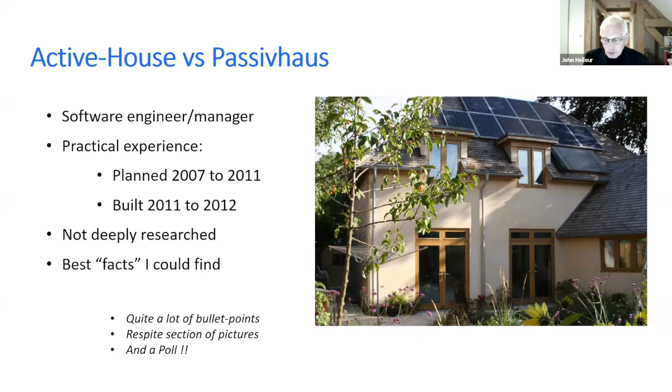There's going to be quite a lot of bullet points initially, but there'll be a respite in the middle with some pictures of the build, which I thought you might be interested in. And we'll have an exciting bit of poll in the middle as well. I offered to do this talk when, about a year ago, we had a talk about passive house in Ipswich, and I thought it would be interesting to do the comparison between my case study new build and this passive house.

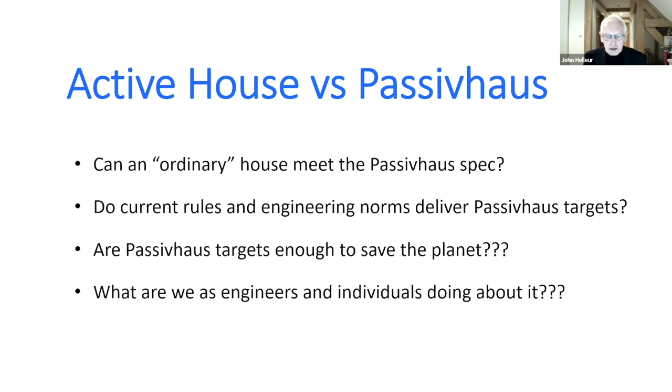And I want to cover 4 questions, really. So can a fairly ordinary looking house meet the passive house spec? Do the current rules and engineering norms deliver passive house targets generally? Are these targets enough to save the planet? And what are we doing as engineers and individuals about that ourselves? So I'm going to cover those 4 areas.

First off, the passive house. So what did we learn a year ago? We learned that primarily it was about the space heating demand. And we were told very clearly that the passive house target was 15 kilowatt hours per square meter per year. And we were looking at walls with a thermal transmission coefficient, so the amount of heat that leaks through them, of 0.15 for walls and roof and 0.8 for windows.

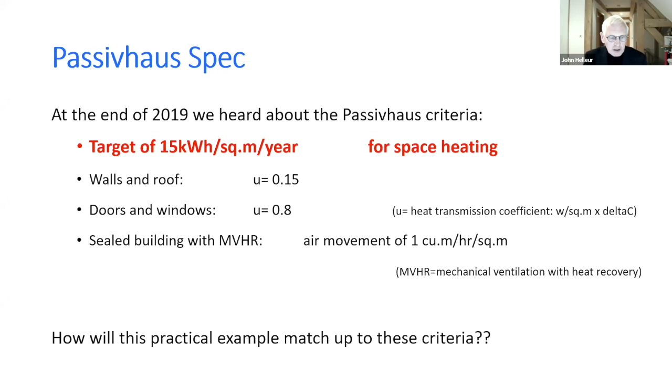And it also is based on a sealed building, so it requires mechanical ventilation with heat recovery. And the air movement has to be really well controlled, with something like 1 cubic meter per hour per square meter of floor space. That's the basis. How does my practical example match up to that?

So just an outline of the case study. So this is a build in central Ipswich. It was a constrained site with mature trees. It was deliberately designed primarily to cope with 2 people getting elderly gradually. So although it's got 3 bedrooms, the main bedroom is on the ground floor, and it was intended to be eco-friendly in both build and operation.

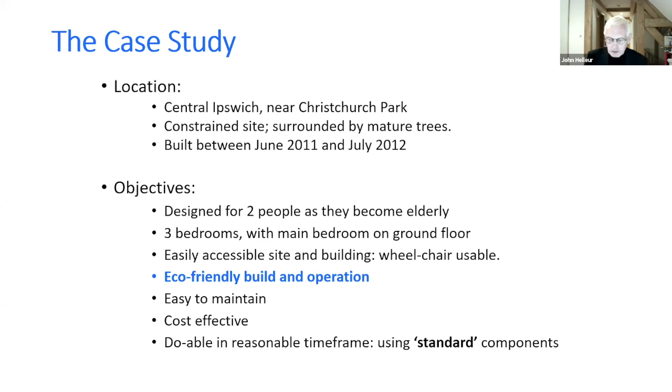And because I wanted to do the build fairly quickly, it was based on fairly standard size components. So can that match passive house? So here's a picture of the front and the back of the house. It's about 168 square meters.

We purchase every year about 3.65 megawatt hours of energy from any source. And that's about 21.7 kilowatt hours per square meter. And the mechanism that we use for walls and roof had this thermal factor of 0.17. The triple glazed doors and windows had a thermal factor of 0.93. And we sealed every joint that we could possibly find in the house and ended up with an air leakage figure of 2.84 cubic meters per hour per square meter.

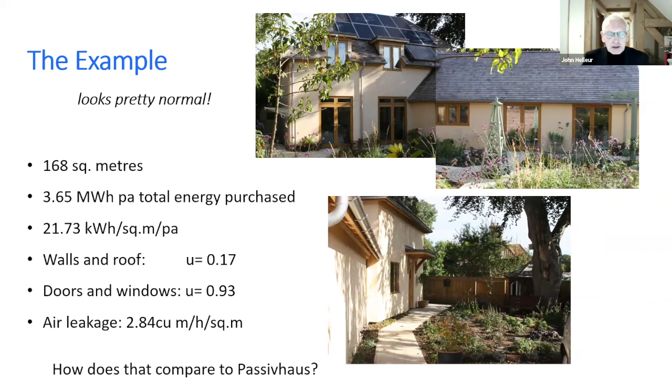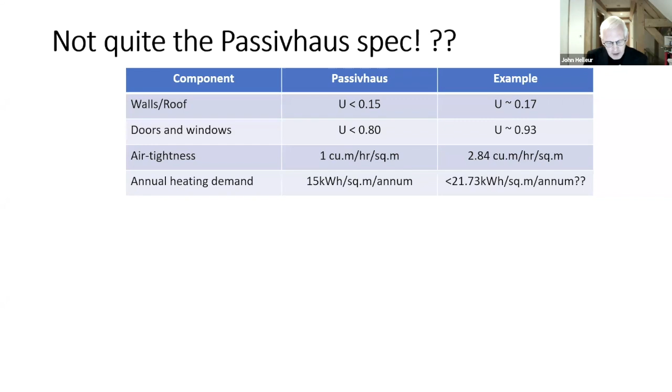So lots of figures there. How does that actually compare with the passive house spec? So the components of walls and roof and the windows fairly close, but not quite close enough. Air tightness, definitely not. So although we tried very hard, the house is more leaky than one would hope to get with a passive house. And at face value, the annual heating demand looks as though it's not there, but we just need to go back and check, don't we? Because that passive house spec was about space heating only.

And I've quoted so far the total, which includes lighting and cooking, washing machines and fridge, freezers and so on, and also the mechanical ventilation. So based on usage through the summer, so when there's no heating at all, the energy demand per day from the house is about 3 to 5 kilowatt hours a day. So multiplying that up crudely, we would get about 1.46 megawatt hours per annum.

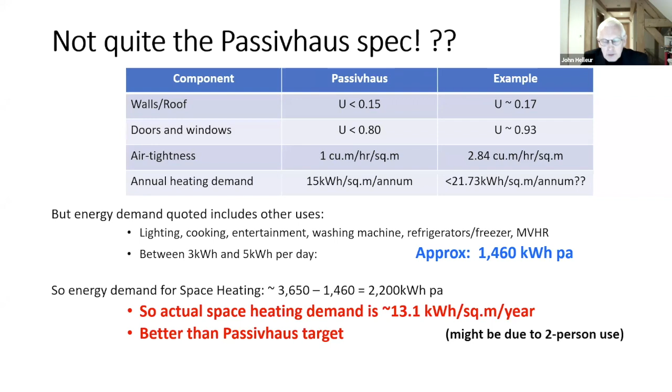So if we now apply that again to our square meterage, we would end up with a total demand just for the space heating of about 2.2 megawatt hours per annum and an overall space heating per square meter of 13.1. So maybe we've got there. I just wave a small flag that this is based on 2 people using the house, so that might not be quite a fair comparison, but let's just say we're pretty close.

Just wanted to mention one other thing here, that the internet tells me that the average house nowadays in the UK has a floor space of between 70 and 80 square meters. So it's about half the size of this case study house at 168. And the average house uses 12 megawatt hours of gas and about 3.7 megawatt hours of electricity. So a total of about 15.7 compared to what we're talking about here, which is 3.6. So we're looking at something with twice the floor space and something like a quarter of the energy demand.

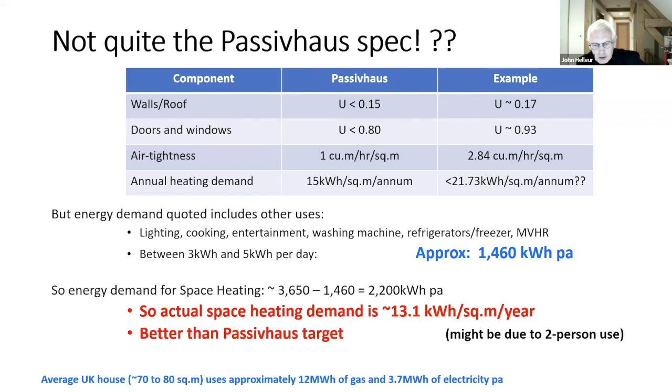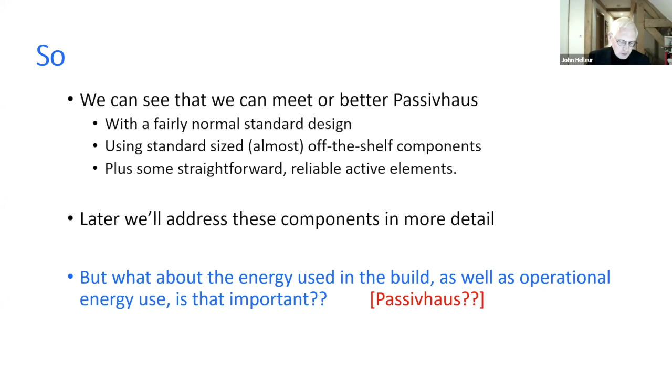So not too bad. So for the first question, it looks as though we could put this together and match Passivhaus, but it looks as though we need active elements involved, not just passive elements. But I want to just raise one thing. So we're talking about operational energy, as I would call it. We're not talking about the energy required to do the build of the house. And I think we should look at that too. I don't know whether that's normally involved in the Passivhaus spec, but I think we should address it.

So it's called embodied energy or embodied carbon. And it's about the energy required to extract, refine, process, transport, and fabricate the materials of the house. The internet tells me it's typically 20 to 50% of the whole life energy of the building. So it's non-trivial, but often it's forgotten. So what should we be building with?

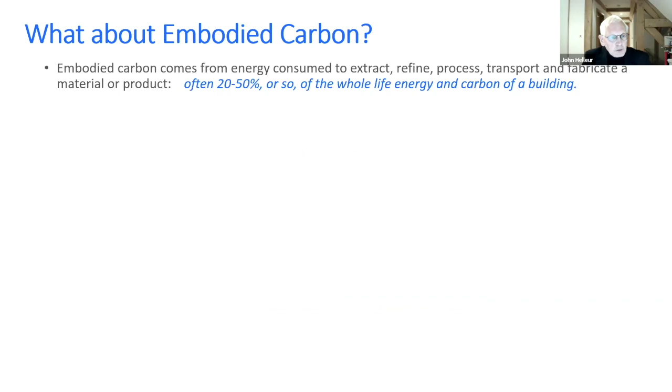But I would just warn that you need to think about the weight of the materials going into a house. So if you take the top line of kiln dried sawn softwood and compare it to clay bricks, for instance, it looks as though the clay bricks might be a better bet. But if you actually apply the weight difference, then the kiln dried sawn wood is 80% less in terms of embodied energy than brick.

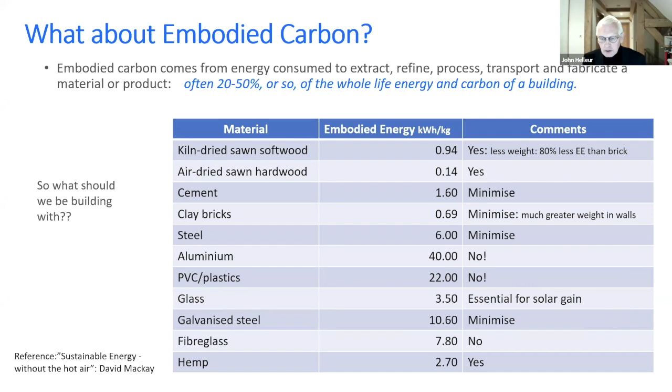You can also see that if you look at things like the insulation at the bottom, comparing the fiberglass with hemp, there's quite a substantial difference.

So embodied energy, let's look at what we actually used in our build based on those figures. The main structure, insulation, walls and roof, used panels made of softwood with hemp insulation, about 370 millimeters width, which is what's recommended these days. The main construction was wood. It happened to be oak frame because we liked the idea of that, but you could use cheaper wood to do the framing. We used softwood and fiberboard panels for the walls and roof, and you could basically make the whole build out of those panels by just screwing them together.

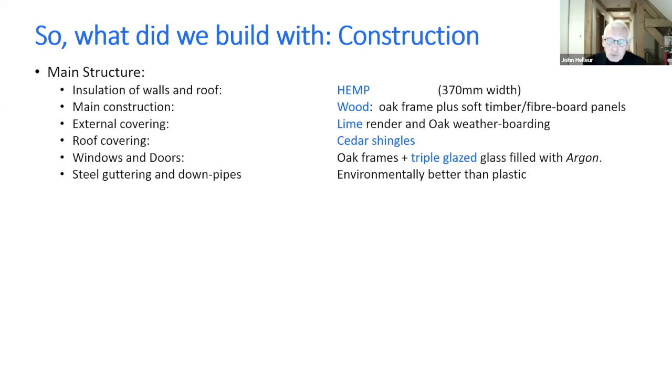The alternative for the oak frame would be glue laminated wood. We put lime render on the outside, which is more eco-friendly than any other type of render, and we also used oak weatherboarding. For the roof, we decided to use wooden shingles, cedar shingles, instead of normal clay tiles. They probably haven't got quite the same lifespan, but they'll last at least 60 years or so. All the windows and doors are oak framed with triple glazing, filled with argon. We used steel guttering and downpipes because that's more environmentally friendly than plastic kit. So that was the main construction.

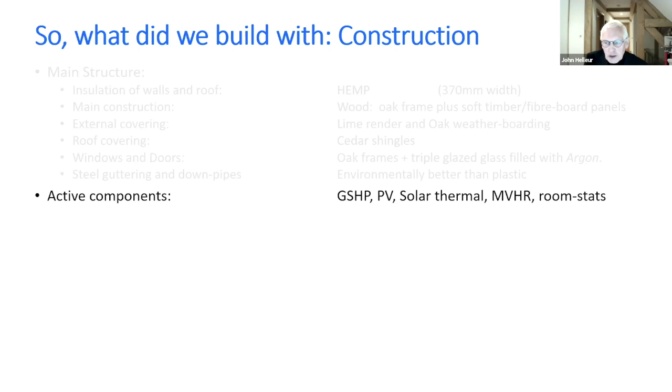We then added active components: ground source heat pump, photovoltaic panels, solar thermal, the mechanically ventilated heat recovery system, and each room has got separate room stats to control timing and temperature. Then there was a bunch of other stuff where we used all LED lighting, 60 LED lights. We've got a 3,000 litre underground rainwater store, which feeds 2 toilets and the garden tap. I'll mention it again later, but that with modern taps and so on has allowed us to save 50% of the water we used to use in our old Victorian house. We designed to have south-facing windows where possible into the main living rooms to get solar gain.

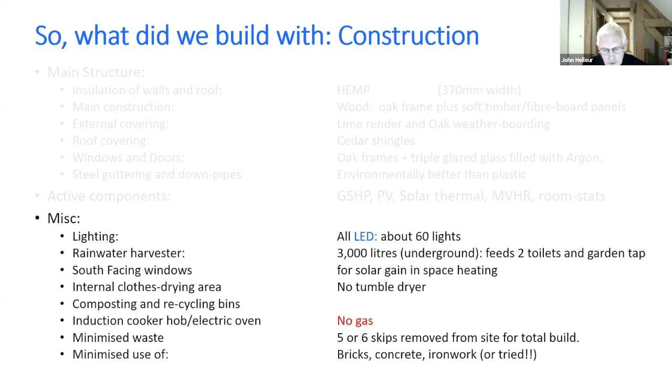We don't have things like a tumble dryer because that uses too much energy. We don't have any gas, so we deliberately didn't connect any gas to the property, and we use a cooker with an induction hob, which seems to me to be extremely efficient. We also minimized waste, so we only used as much materials as we needed to. I was really careful about trying to estimate everything, and I tried really hard to minimize the bricks, the concrete, and the ironwork, although I don't think I succeeded as much as I would have liked.

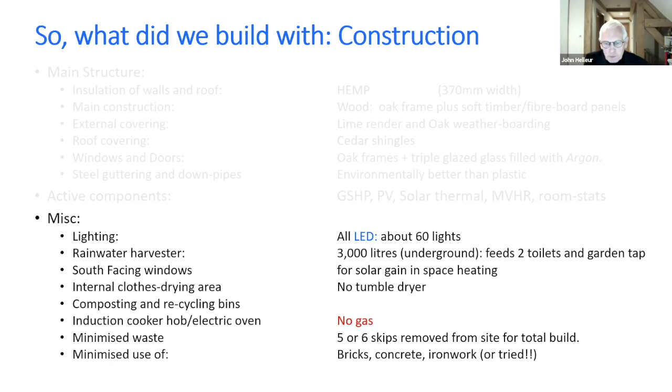So how does that fit together now in terms of the overall embodied energy if we put those components into the build? This is a pretty crude comparison, so don't get too excited about the accuracy of the numbers. I used the MacKay source again to give me the basic information, so that's where the standard house information came from. It's based on a standard house of 100 square meters floor space, and it's based on the usual brick and concrete tile construction.

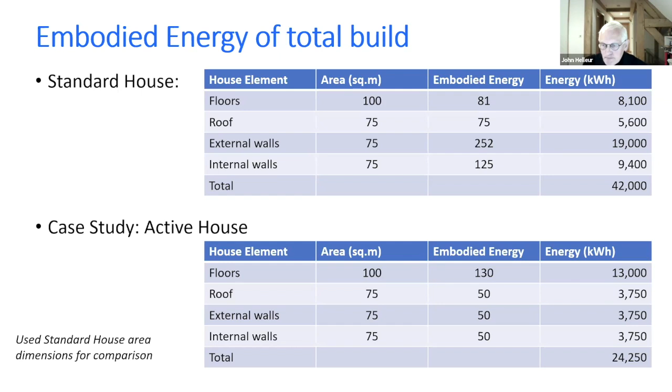So the standard house in this example with 100 square meters of floor space comes out with an overall embodied energy of 42,000 kilowatt hours. I've then approximated putting the materials I used into that same calculation, and it comes out at approximately 24 megawatt hours. That's close-ish to half. To be a little more accurate, it's 58% of the standard British house. If you multiply that up from 100 square meters to 168 square meters, the reality, then the embodied energy of my house is somewhere in the region of 41 megawatt hours.

So you can then compare that embodied energy, the cost of the building in energy terms, with the operational costs. In terms of the numbers I've given you, it's about 11 years worth for the build. If we built with standard components, it would have been something more like 19 years worth of operation in order to save that. So embodied energy, not to be forgotten, but often underestimated.

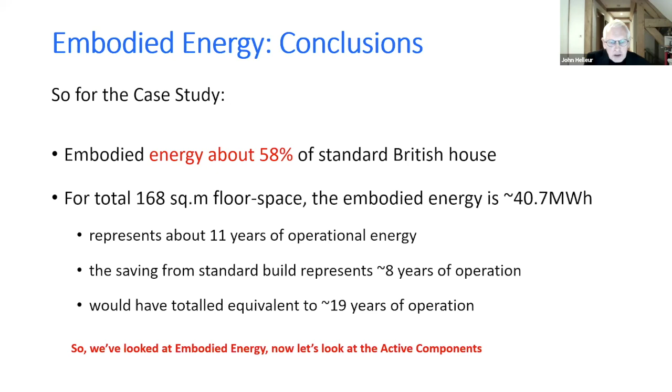So let's look at the active components, shall we? They might be the most fun stuff. PV panels, the obvious thing to stick on the roof. We put 10 panels in. In those days, they were 250 watt peak panels. They're still performing pretty well after 8.5 years or so, probably running at about 95% of spec, and they generate 2.1 megawatt hours per annum.

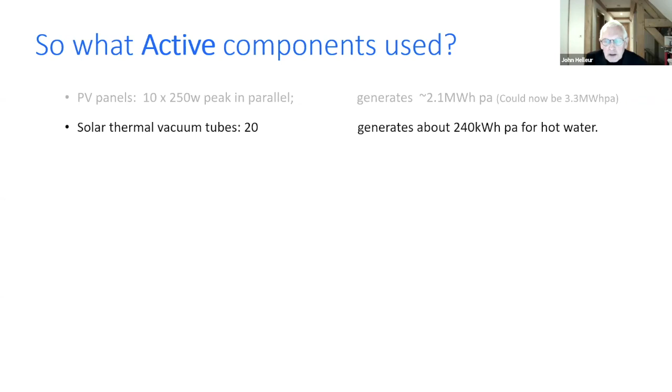I noticed, and I'll talk about it again later, that the latest panels are coming out at about 370 or maybe 400 watts a panel, which would allow me to get 3.3 megawatt hours out of the same roof space. The solar thermal, 20 vacuum tubes, is worth about 240 kilowatt hours per annum to me. I might well have been better off putting 1 or 2 additional PV panels in there instead.

The ground source heat pump is a 6 kilowatt Kensa, manufactured in Cornwall. Nominally it has about a 4-to-1 gain, so for every kilowatt hour of electricity you put in, it generates 3 or 4 kilowatt hours of heat. It's extremely efficient. I think they cost about £5,000 to buy the box these days, and then there's another amount, which I'm guessing is in the £4,000 to £5,000 mark, possibly more, to put a collector in the ground.

That can either be a slinky that goes into a trench about 5 or 6 feet deep, or vertically drilled bores in the ground. In my case, we've got 120 meters of collector in 4 vertical 30-meter bores, because there wasn't enough room for the slinky. I should say the heat pump is extremely low maintenance, so there's hardly any maintenance needed.

That drives an underfloor heating system with water circulating, with 1 or more loops in each room. I'm then able to control each loop independently with a timer and thermostat, so we run each room at a different temperature, potentially in a range of about 18 to 22 degrees or so, so we can be very efficient with using the heat.

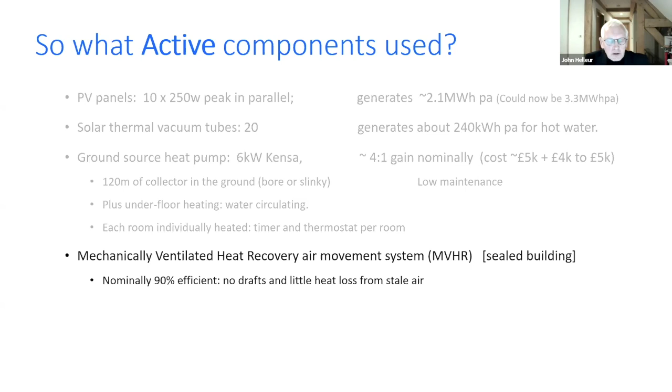LED lighting - we've had experience of a massive amount of these, 27 downlighters. I chose to use GU10 spot bulbs in GU10 holders, which I could adjust because I wasn't sure how to do the lighting design, and that seems to have turned out pretty well. I think we've had about 2 or 3 failures of those in 8.5 years. They've been pretty reliable, not necessarily up to their spec of reliability, but pretty darn good.

So overall there's nothing very clever there when you boil it down - it's mostly pumps and fans. So what's supposedly futuristic is pretty basic, actually, in plumbing terms or whatever. I should say there's obviously embedded energy in those active components, which I haven't calculated, so there's actually more energy cost with them.

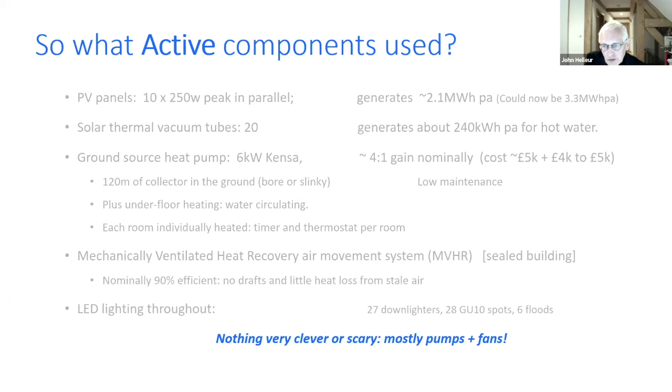I thought you might like to see something about the money. So this is from my personal experience, so it might not be in any way typical.

The operational savings - we were in a Victorian house with similar floor space in the end, but it leaked like a sieve in terms of drafts etc. We made quite a lot of savings on water because we were only using half the water now, which is quite valuable really, plus no boiler maintenance basically. So operational savings over the 8 years or so has been nearly 8,000.

Then there are incentive payments for the various active components - the renewable heat incentive for the ground source heat pump and the solar thermal, and the feed-in tariff for the photovoltaic. I put those in and got those incentives when they were at their best. I think you can still get the ground source heat pump RHI, so that one would still be valid. Overall, the efficiency gains have paid me back quite a lot in the 8.5 years. I looked on the internet to get the current state of play in terms of return on investment and payback period, which I put at the bottom here.

So the internet tells me, and again be skeptical about these numbers, they might not be right, but I suspect they're in the right sort of order. Ground source heat pump with a payback period of 11 to 12 years, and photovoltaics with a payback of about 16 years. The payback for me with the incentives I got was more like 10 years, I think. So anybody with money sitting in the bank at zero interest should be thinking about investing in active renewable components, because you'll get a better return on that money.

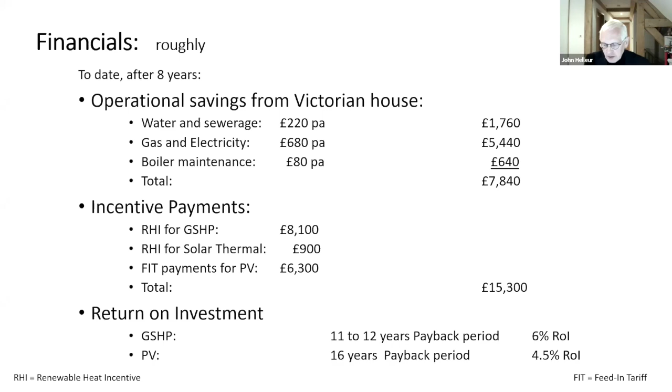So I thought you'd like a rest from the bullet points at this stage. I thought I'd show you some pictures of the actual build, since you're all engineers out there.

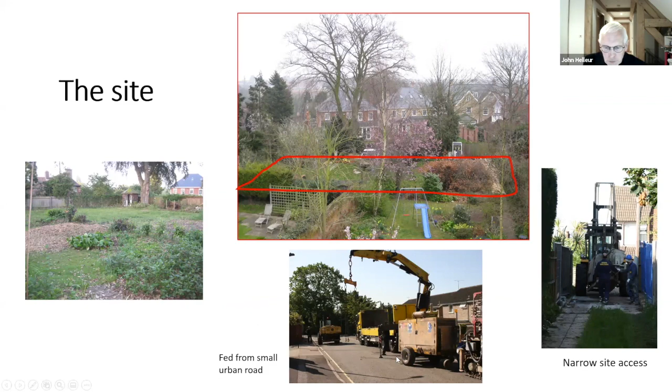Quite fun in that we had to access the site - if you look at the right-hand picture - through a very narrow driveway with about 2 or 3 inches on either side for the major tractors and things coming up and down. And we had to feed the site from a pretty small urban road, really. So it was an interesting exercise.

So the good old tree imposed lots of challenges on the foundations. The root protection zone for this tree covered about a third of the site, and it was that third where it made most sense to put the house. So we ended up needing to put the house on piles rather than strip foundations. Engineering told me it was 24 piles, which had to be 6 meters deep, 300 millimeters in diameter, reinforced.

If you look at the left-hand side, some poor devil had to use an air lance to blow the earth out from the top of each pile hole to check there were no major roots in there that would be damaged by piling. A young worker had to do that for 24 piles, poor chap. I gave him lots of moral support.

This is the picture of the guys drilling. On the top right-hand side you can see piles exposed by the digging out of a cellar, which is basically the basis for an equipment room. Below that, on the bottom right-hand side, you can see it massively reinforced to make sure it doesn't go anywhere, I suppose. The engineers amongst you will enjoy the fact that we planned plenty of ducting for all the services leading into the equipment room.

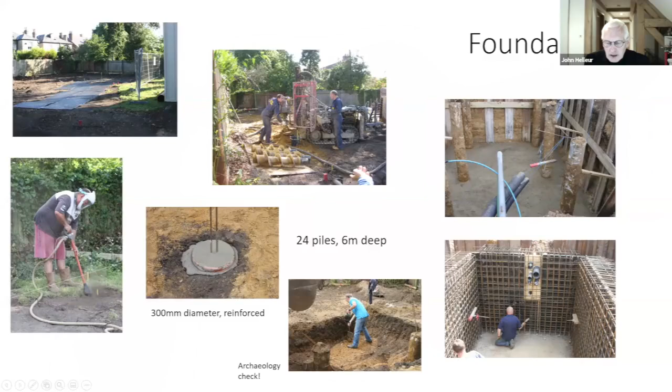And I thought you might like to notice, bottom middle, we had to get an archaeologist in to check we weren't putting the cellar in the middle of any sort of Saxon site. Foundations, lots of concrete and rebar going in. You can see the cellar has appeared as a nice brick bunker, concrete bunker now, which is 3 meters by 4 meters by 2.4 meters high. And here's a lovely clean base - a fairly massive concrete reinforced base sitting on 24 6-meter piles. I think that's probably enough for about a 4-story office block or something.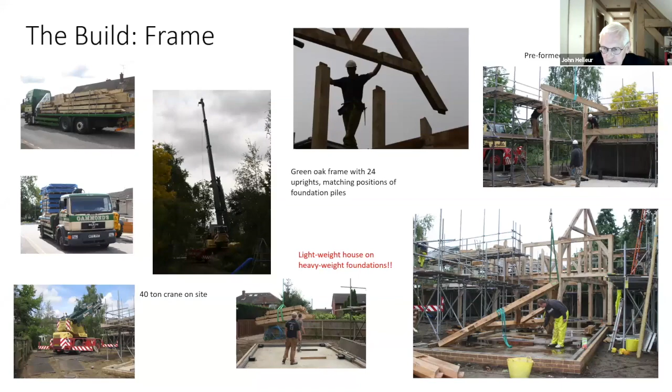It forms its own frame if required, so you just need sort of foot-long screws to go in.

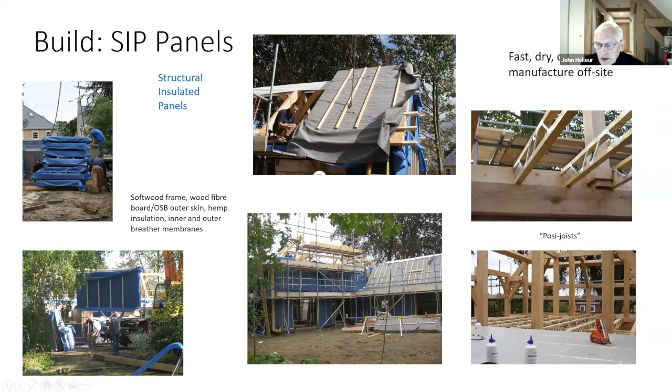You might be interested in the fact that we were using these lightweight posi joists up on the right-hand side, which are really good for running services down the middle of the ceiling void. The last one is for all the plumbers amongst you.

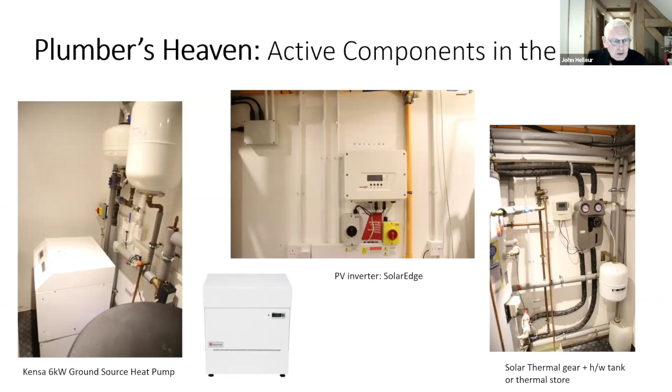So I'm afraid that's all the pictures I've got time for at the moment. So I want to now raise the engineering issues I came up against during this build.

What's happening is the building industry seemed, certainly at that time, and I suspect it still is when I look at building sites, still clinging on to old methods and components. It's still not worrying about the embodied energy of what it's using to make the builds.

And there seems to be little understanding at any level, from architects onwards, it seemed to me, certainly with my experience anyway, of what's needed with a green approach.

So I certainly ended up fighting at every level to make sure that green solutions and new techniques were put in. I should stress that the approach of SIP panels and so on, I think will work extremely well and is very amenable to factory production.

So it's much more rapid on site. You don't get loads of problems with water, etc. It's a quicker and drier solution. I'm sure in Germany and places they actually have services already installed in those SIP panels, so you can just plug wiring, etc. together.

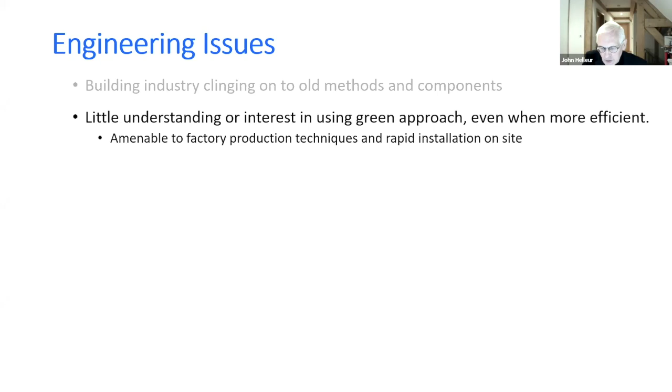I was told by my contractors that there's massive amounts of waste on sites generally, all of which is costing energy. I came across several examples of overestimation.

Had a substantial problem with the heating design where they were trying to get me to buy a ground source heat pump which was twice the size as it needed. I ended up having to do my own spreadsheet and worked out that in worst case I needed about 2 kilowatt hours per hour.

to heat the whole house under really cold conditions. So the 6 kilowatt ground source heat pump is actually overkill, really.

And I still think maybe those foundations were a bit over engineered. I'm sure the engineering company I used did all the right things, did the right algorithm and so on, but I would question whether that's appropriate with a lightweight house.

So it was a lightweight wooden house sitting on 24 pillars. You would think that that wouldn't require a massive base, but there you go.

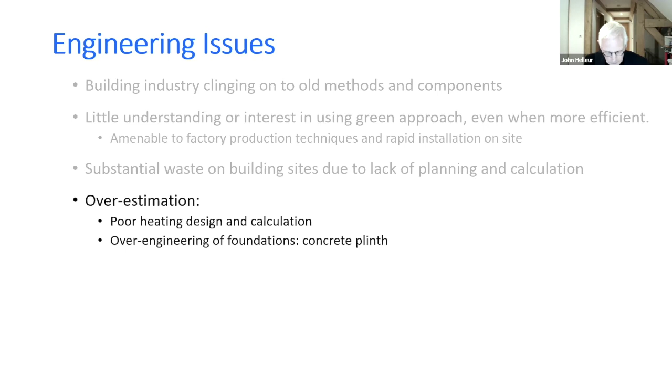I think the bit that got to me most was the fact that to get planning permission, at the time I had to fill in a code for sustainable homes, which was a point system to encourage sustainable buildings, apparently.

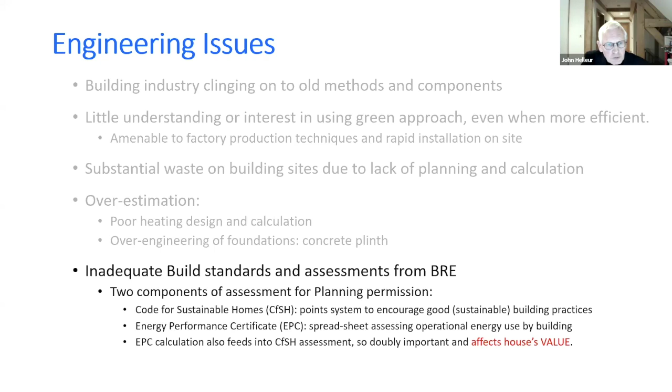I had to get an energy performance certificate done, which was a spreadsheet assessing the operational energy of the building. So it was interesting because I wonder what you think the answers would come out for with this house.

So we've just seen that it's very close to passive house, maybe slightly better even, so that's the operational energy bit is good. You saw that the embodied energy bit was pretty good, and you can take it from me that I was very careful with the build.

Where did we come out in terms of the code for sustainable homes, which is a range, it goes up to 100, and the pass mark for planners is 60. So here's what we got. So we just passed.

We didn't get highly efficient on the energy performance certificate either, which I was fairly incandescent about when that happened. I decided I'd look into it, so I went through very carefully the code for sustainable homes. This was in 2012 now.

What I found was it was very biased towards site management points and biased away from embodied energy and operational energy points, which seemed to me to be the opposite of achieving a sustainable home. It was also radically biased against self-builders. You couldn't sign up to their considerate constructors scheme, lifetime home schemes, or waste management scheme.

Even though you followed all the principles, you couldn't get any points for that as a self-builder. For the spreadsheet bit, I eventually unpicked it step by step and discovered it was biased against new technologies—it totally omitted LED lighting. The one I liked most was that you got more points for an efficient gas boiler at 90% than you did for a ground source heat pump at 400% efficient. I found that slightly confusing. Overall, I discovered an error level of about 30% in the spreadsheet.

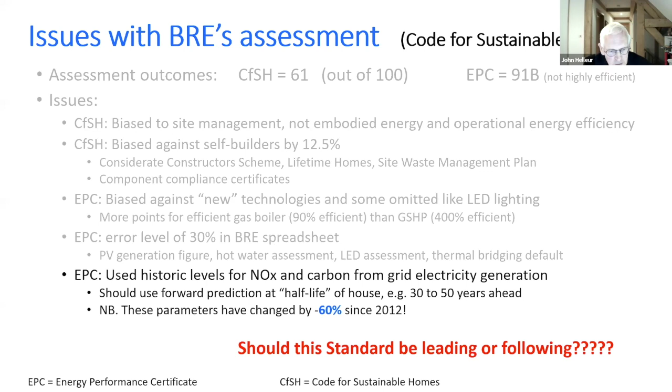The bit that irritated me most was that they calculated the NOx and carbon levels for grid electricity generation from figures that were from, I think, 2008, maybe 2010, not 2012 when I built the house. My point would be, why isn't it a half-life of the house? So if you expect the house to last 60 years, surely you should take the predicted electricity generation figures for carbon and NOx at 30 years hence.

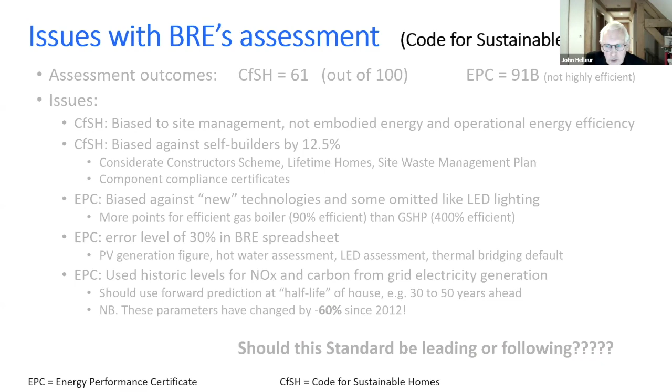I also sent them a report with several recommendations. I don't know what happened to that, but I think the Code for Sustainable Homes has been stopped, and I don't know what's replaced it. I also know the EPC is still spreadsheet based, and I don't know what's in that anymore. So if you're interested, you may have to just unpick those yourselves.

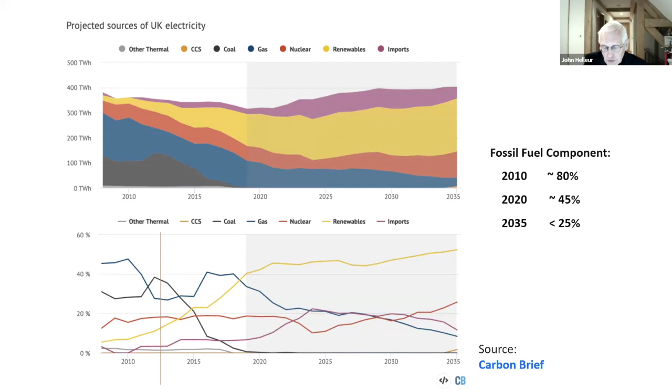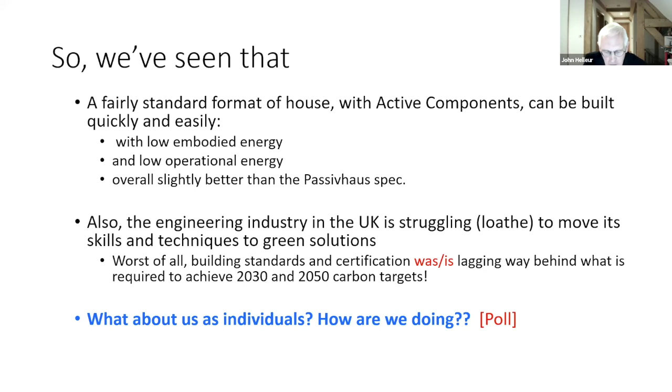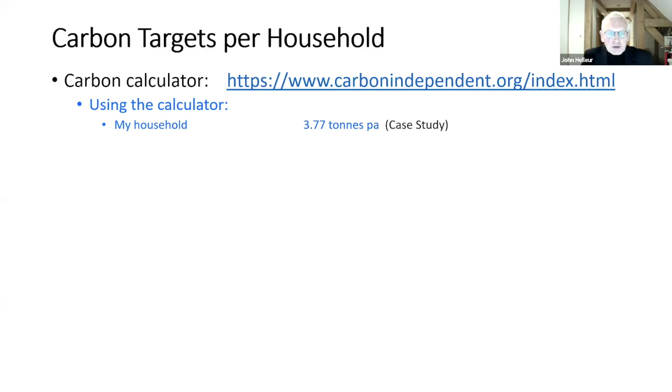Let's look at where we are with targets for each household then. Having looked at the house itself, let's look at the household. So I used a calculator, which I've indicated here. I don't know whether it's the best. It seems to be pretty good. And using the case study, so my household with our current lifestyle, we came out with 3.77 tons of carbon per annum. So where does that fit?

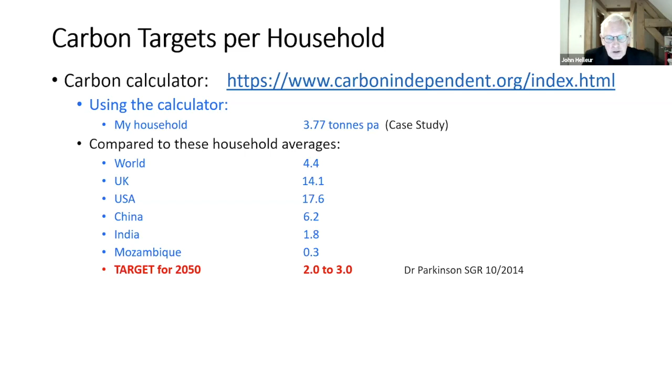Basically, what you can see is I'm not there yet. So I've done all these other things, but I'm not there yet. So is there anything more I could do? Well, I can improve the house. So I could be replacing the PV panels to get more generation. That would cover quite a substantial difference for me. I could use battery storage to make sure I actually use what I generate in the house rather than exporting it and then buying something back in. And that would give me grid resilience.

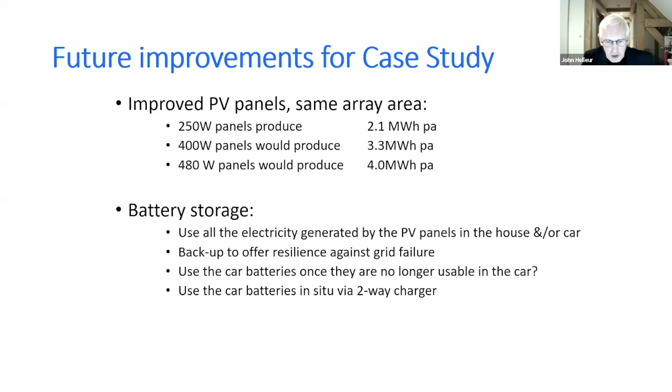I could, in theory, use the car batteries. So I'm going to talk about the electric car in a minute, but we could use the car batteries, and it is feasible to have a two-way charger, which would allow me to run the house off the car batteries. So that's the optimum for me, I think, is doing that, which would get me pretty close to zero carbon and quickly.

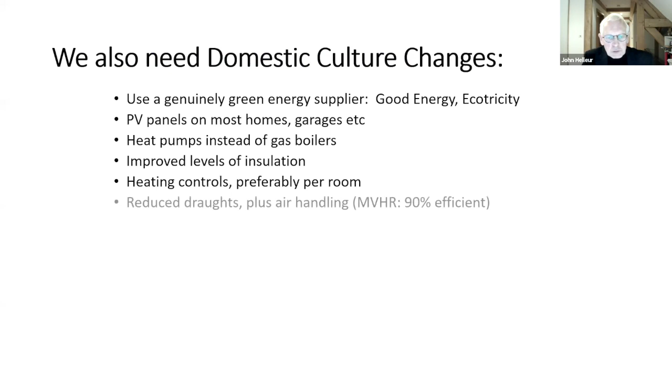So my wife and I are changing our culture. These are the things we're doing and we would suggest you all think about. None of it's very clever, and it is possible. We are reducing our plastic use. We are radically reducing our meat usage. We have just got an electric car. 2 big ones at the end, really. Don't buy so much stuff. Don't waste so much stuff.

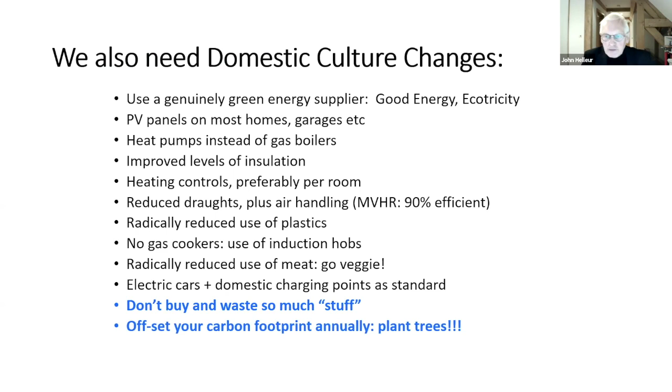One of the things I do is each January, I look at the rough carbon footprint for the household over the year, and then I do an offsetting donation to the Woodland Trust to plant trees. That's my backstop to catch any carbon that I've generated otherwise.

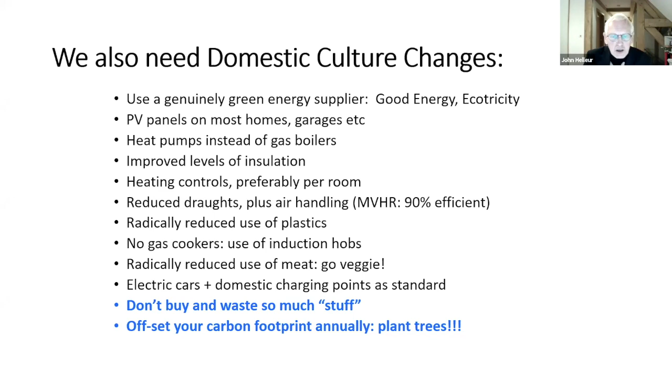So George Williamson was quite keen that I should tell you about the car briefly. I think I've got a couple of minutes to do that. So had it for 4 months now, about 1,200 miles of usage. It's a Kia e-Niro. It's a 5-door sort of mid-sized MPV. For the petrol heads, it's 200 brake horsepower. And I'm told, I haven't done it yet, but it does 0 to 60 in 6.9 seconds. So it's a bit better than a wind-up car, really.

It does a genuine 280 miles of range with a 64 kilowatt battery. It's been doing better than that range in the summer. I guess it will do worse than that in the winter, but it's pretty good. It's very efficient around town. It's reasonably efficient on motorways. I'm charging it at home with a My Energy Zappi charger, which is a British made charger. It does 7 kilowatts from the grid.

And what I like about it is it gives me an option to do a PV trickle charge straight from the PV panels. So it will only take the PV, which obviously costs me nothing to fuel the car at that rate. So at the moment, it's costing me between 1p and 4p a mile to run. If I use fast chargers on motorways or whatever, it costs about 6 or 7p a mile. And it really is excellent to drive. It's got excellent acceleration. It works very well in slow traffic in towns. It's very quiet and it goes up hills like a bomb.

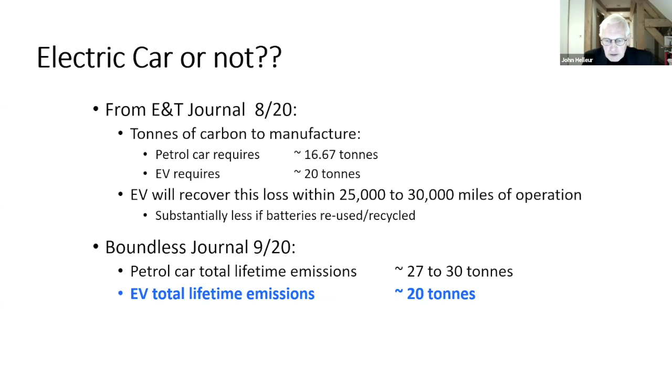Should you get one or not, there is a penalty in terms of embodied energy in the car, apparently, certainly at this stage. So it takes slightly more carbon to build an electric car, so the E&T journal tells me, but you can recover that over the mileage that you use the car. And the Boundless journal told me that the EV lifetime emissions is lower, quite substantially lower than a petrol car. So you have to judge when you jump, or if you jump.

Just to round off then, I think I've suggested that it can be pretty easy and fast to build close to Passivhaus without it being extraordinarily expensive. Active components can get you to Passivhaus or better. We should remember that we need to worry about the materials we use and the embodied energy.

And for goodness sake, guys, let's sort out the engineering standards, because my suspicion is, although they might not be as bad as they were in 2012, they are not good enough for getting us to 2050. And we'll see what the poll was saying, but I suspect we all need to do lots as individuals and engineers. And we need to do that starting now, not waiting for 2030 or 2050. That's it. Thank you very much.

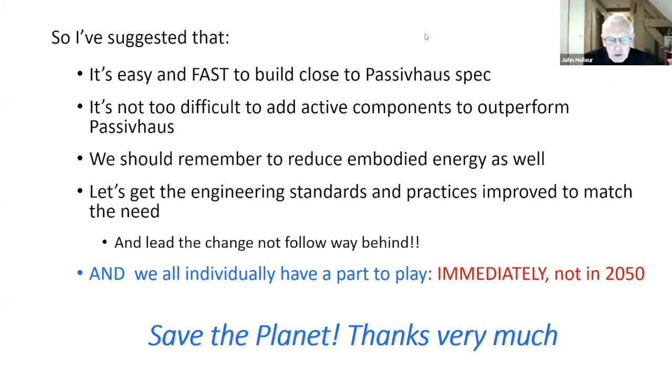Question. Are the energy use numbers primary energy, i.e. is electricity use corrected for generating and transmission losses? I honestly don't know that. I think they're useful as a comparator, but I don't know what is actually in them. I found it quite difficult to get solid numbers out of the internet, I have to say, on several of those aspects. I wasn't entirely sure how good they were, which is why I was stressing that it's indicative. You may have to find better sources.

Okay, John, question from Simon Eddleston, who thanks you for the presentation. From the embodied carbon calculation, what duration is considered to be the whole life of the building? Well, I guess it depends on its construction, but I think your guess is as good as mine. I'm reckoning that if my house doesn't last for 100 years, I'll be amazed. So I just give Simon an example.

If you think oak frame and wooden paneling is somewhat dodgy life-wise, I would suggest you go to Lavenham in Suffolk and you'll see houses that were built about 500 or 600 years ago, still there and perfectly usable. So I don't know the answer to the question. I don't know if there's a norm that the engineering organizations use, or BRE, but certainly with the technology I've used, I would expect my house to be here in at least 100 years.

Okay, John, a question from Malcolm. How many kilowatt hours of solar photovoltaic did you use? And do you find that this makes up for the lack of gas, or are you buying a lot from the grid? Okay, so I think I tried to cover that before. So we generate 2.1 megawatt hours per annum from the PV panels, and I'm not able to measure what I use and what I export to the grid. The government figures assume half of it goes to the grid and half of it is used in the house.

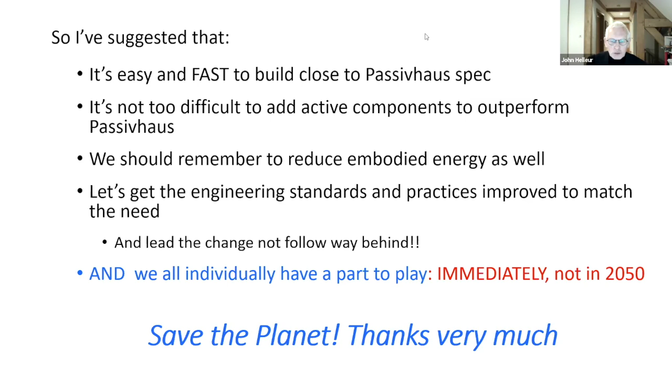Thanks for the feedback, guys. That was great. I'm afraid we don't have much time for further questions. I'll ask one more as a final question, John. Can the heat pump be used in reverse for cooling in summer? It can, yes. So you end up with slightly cooler floors. And the good news about it is you're taking that heat and putting it back in the ground where it's stored, so you can use it again more easily. So the heat then comes back in the winter for you. I mean, I don't think it cools massively. It's not like air conditioning, but it helps.